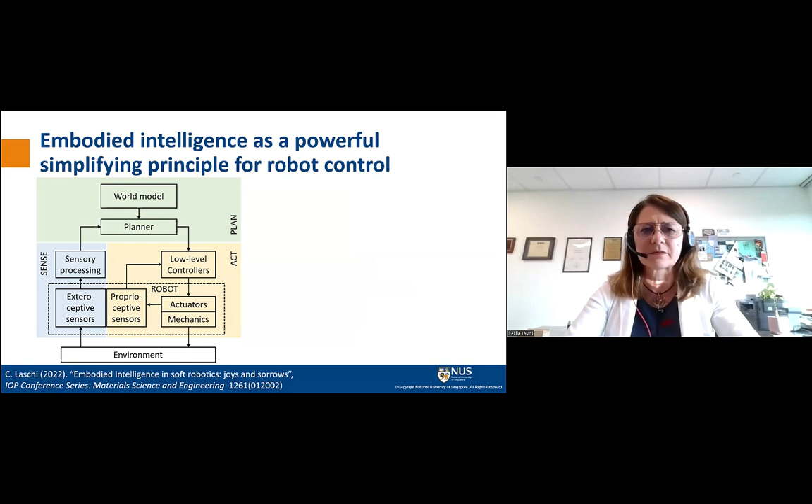Embodied intelligence can be a very powerful simplifying principle for robot control, because it introduces the use of external interaction forces from the environment - an additional arrow from the environment directly to the body. This is what we were discussing - what is embodied intelligence, which we want to discuss in this conference. This is, for me, the meaning of embodied intelligence. And why is it a simplifying principle?

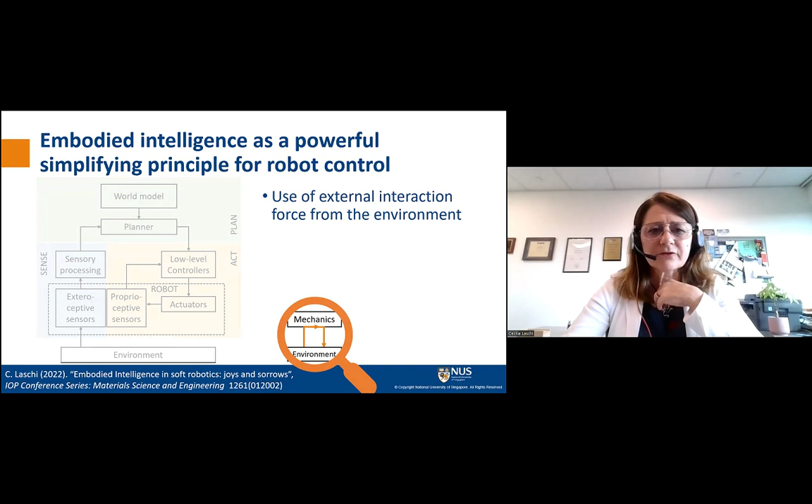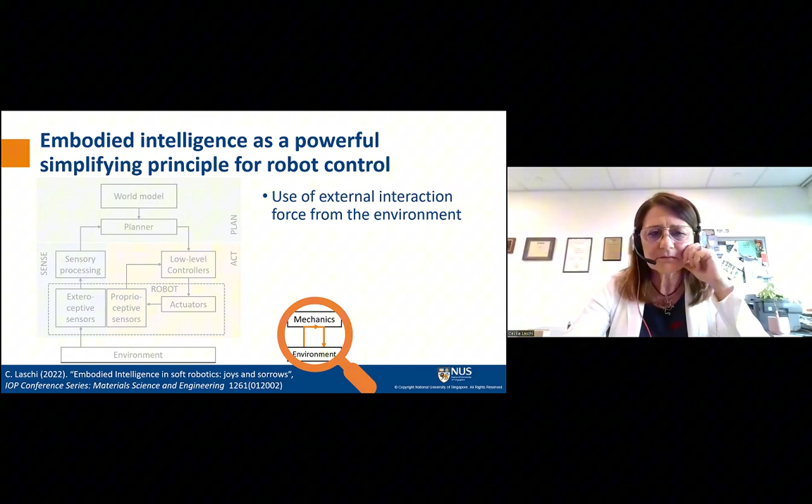Because it's like closing a control loop here on the robot body only, focusing on only these interactions with the environment. We forget all the rest. This is what we like in embodied intelligence, and we focus on this. This is also what brings us to soft robotics, because if we want to focus on those two arrows, we want to grasp the simplifying principle of these interaction forces with the environment, then we need a soft body. We need compliance in our body.

This is also a big lesson we learn from nature. If we look around at the majority of animals, including human beings, the body mass is mostly soft. In my own research, as most of you know already, a wonderful model has been the octopus. It's not just a model for soft robotics, but also for embodied intelligence, because it shows very clearly how many tasks can be simplified by using the interaction with the environment.

This is just one of the many examples we can learn from an octopus. This is the reaching movement to grasp an object, and you see there is a very nice bending which completely reduces the water drag. So this movement is not against the water, but is helped by the interaction with the water. If we look at the biology of it, we found that the brain of this animal only has to set three parameters, and the rest is done in a very simplified way thanks to the morphology - the fact that the body is soft, the arm is soft, and the interaction with the water, which helps. In this project here in Singapore, I'm trying to demonstrate it with some numbers.

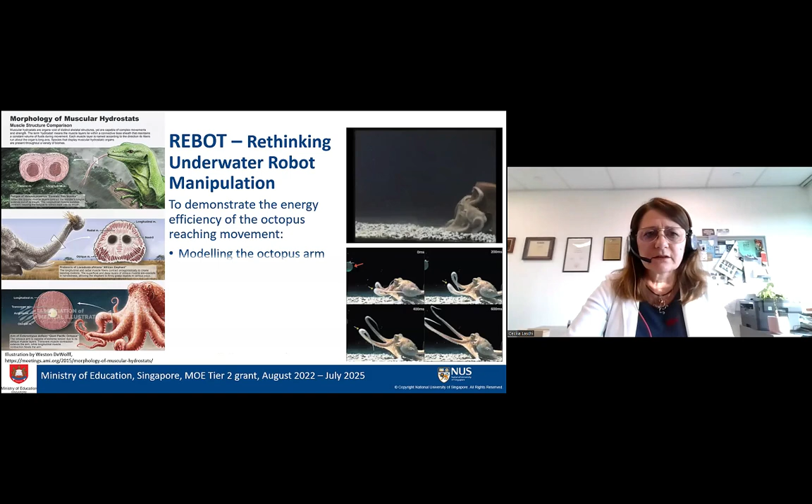We want to demonstrate the energy efficiency through some fluid dynamics. We want to model this arm and model the interaction with water, and then, of course, to build a robot. And thanks to this other project, which is a collaboration between Italy and Singapore, we could collaborate with Polytechnic of Milan, who developed a modeling framework for muscle activations, and we can simulate the activation of all the muscles in an octopus arm.

So what you see in this simulation is one of the many patterns that we tested. This is the best one, which gives a movement very similar to the octopus one. So we found which muscles should be activated and when to obtain the same reaching movement.

And as I said, we want to use all this in robotics, and this is a prototype of a robot that can do the same reaching movement. It's also very fast. So what is interesting here is not the movement itself, but the fact that similarly to the animal, the proximal part, before the bending, is very stiff, while the rest, the distal part, is completely passive. This is the secret for the animal to be helped by the water instead of fighting it.

So all this movement in the animal involves many muscles, so very complicated control. We have just one actuator, which is a tendon with a motor. So super simple control. This is another possible movement in the octopus, which is the swimming movement.

Let me jump to the better part of the video.

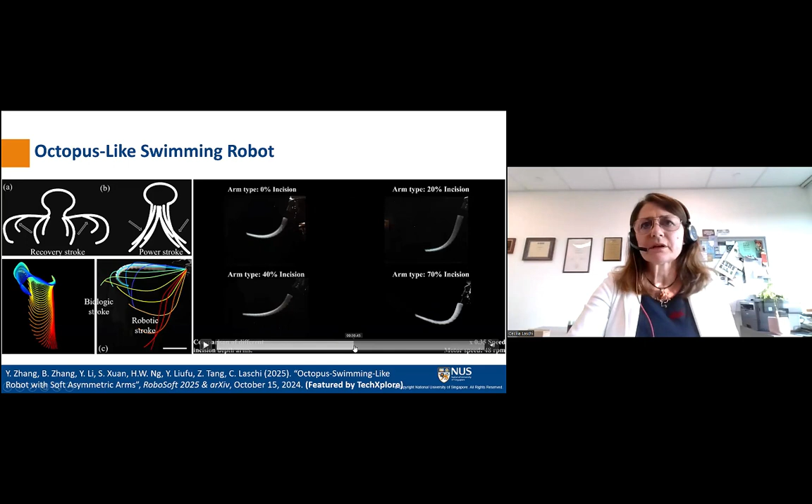So we study how we can generate propulsion with an anisotropic stiffness of the arms, and this is how the robot can swim. Here as well, the fluid dynamics is pretty complex to generate propulsion, but we only have one actuator, one motor. We can have 2 if we want to steer, but 1 is enough for swimming.

We also investigated another interesting characteristic of the octopus arm, which we found also in the elephant trunk, as well as in so many structures in nature, including plant structures, which is the logarithmic spiraling. They all follow this mathematical relation. So we built a prototype which has the same morphology, it also follows the logarithmic spiraling, and it can produce very similar movements as an elephant trunk.

We have data from elephant trunk, so that's why we consider it for comparison. Even if it's completely different in terms of muscle arrangement, here we only have 3 cables, 3 actuators acting as tendons with their motors. So completely different structure, very similar movements, because we follow the same principle of logarithmic spiraling. Again, 3 actuators only, simplified control.

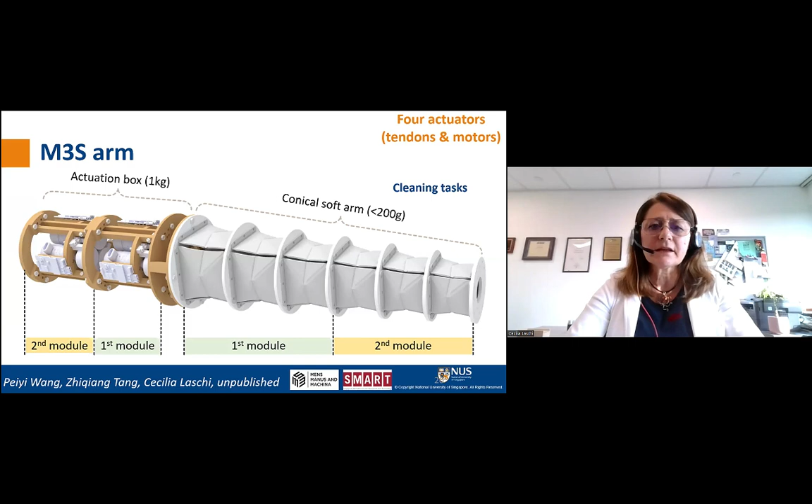Here you see that you cannot see the actuators inside. They are also cables, and we have 4 actuators, so the number is starting to increase a little bit. And it can actually do very nice things. It can completely contract this way, and it can bend also very nicely, very widely. But again, now we start having some more parameters to control.

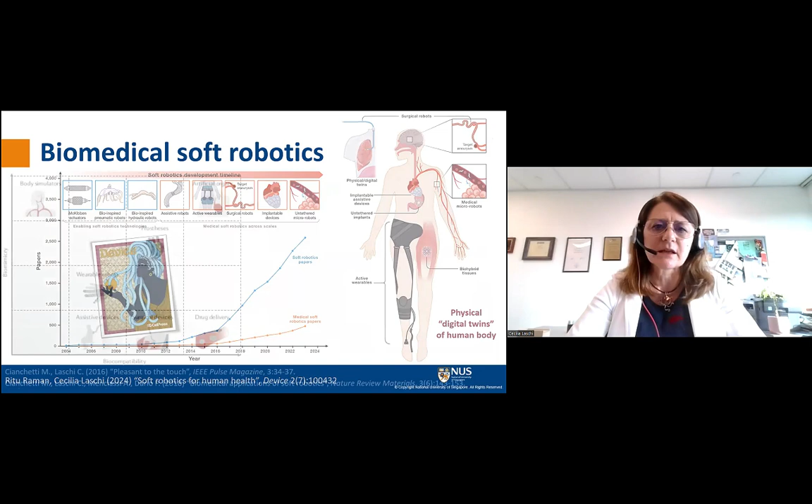Biomedical applications of soft robotics are also increasing. They increased a lot in the last decade, and there are really many different areas where soft robots can be used in medicine, the biomedical field. One of them is personal care, caregiving, assistance to the elderly, for example, which is a priority also here in Singapore. So we are addressing assistive soft robotics. This is the concept of an arm for helping elderly people to stand up from sitting or transfer from a chair to another.

So we developed soft arms for this. They have anisotropic stiffness as well. Actually, inside this module, there is a part which is also inspired by the octopus, and it's confidential because we are patenting. In this case, also we have some more actuators. We have 2 actuators per arm, again implemented with tendons and motor.

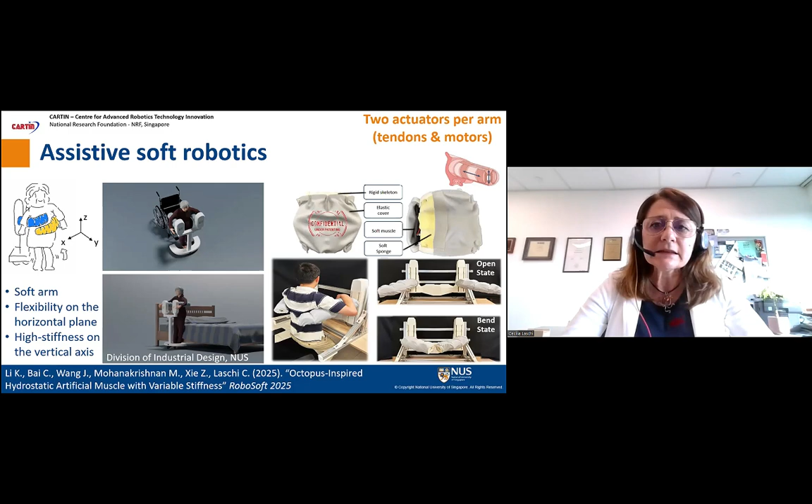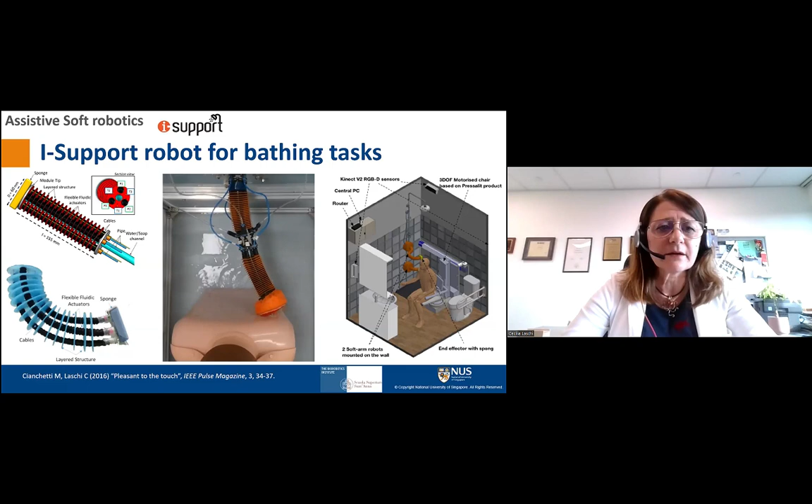In a previous project in Europe, a European project I-Support, we designed this other arm, which is for bathing tasks, for showering. In this case, you see there are 2 modules, and each of them has 3 pneumatic chambers and 3 tendons with motors. So again, the number of actuators is increasing, and the number of control parameters is increasing.

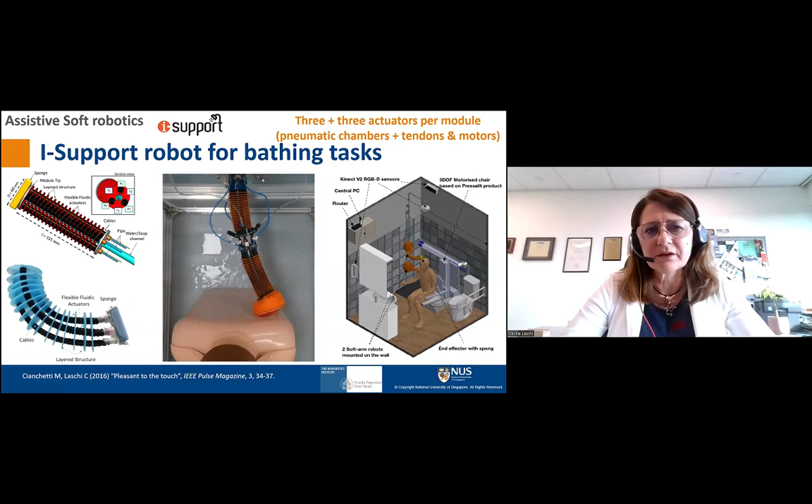But in tasks like this, we really want to control precisely the end effector, and not only the end effector. So that's why these applications are bringing back the need for control that we wanted to simplify with soft robotics and embodied intelligence. So what's the issue with soft robot control?

The traditional approach is using models of the transformation between the actuator space, whatever the actuators are, and the task space, so the end effector position. Of course, we can apply this model-based approach to soft robots, but do we have models?

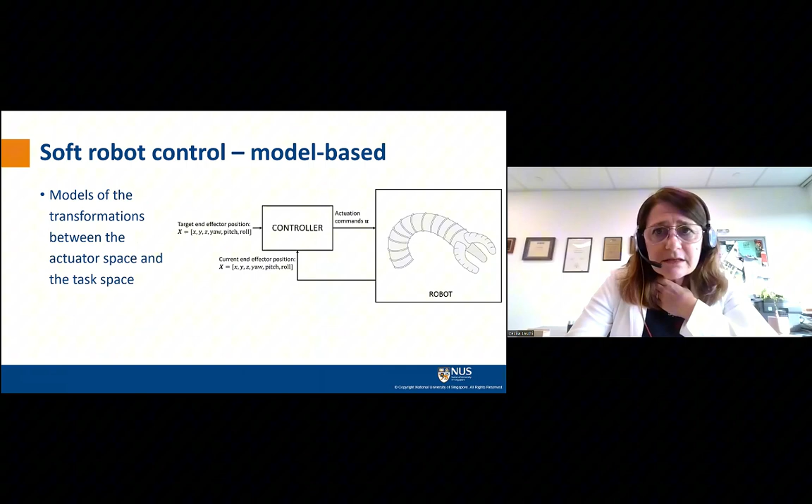So we proposed this approach a couple of years ago, using one general equation. The message is that it has to contain both the internal and the external interactions. We also reviewed existing techniques, because there are techniques for both cases, either in the continuum mechanics realm or with some parameterization, and of course there are also data-driven methods to solve those modeling problems.

And so we have the models. We can do some model-based control, but we have another option, which is to replace the controller completely with learning, with a neural network for example. This is an approach that is being used.

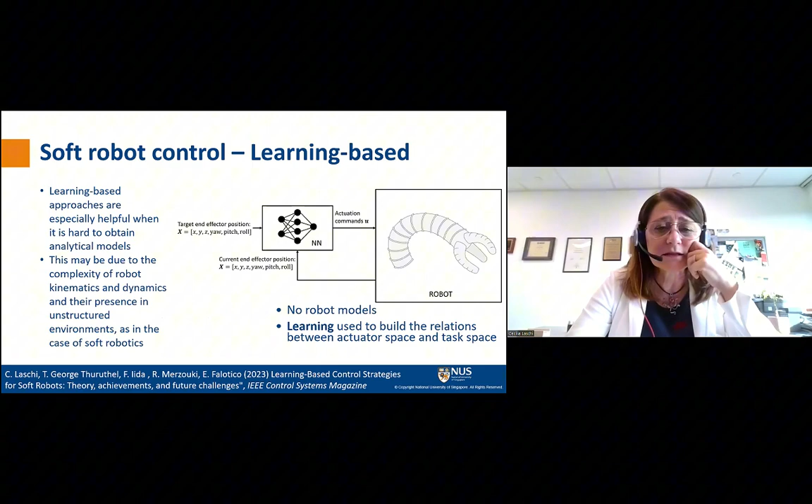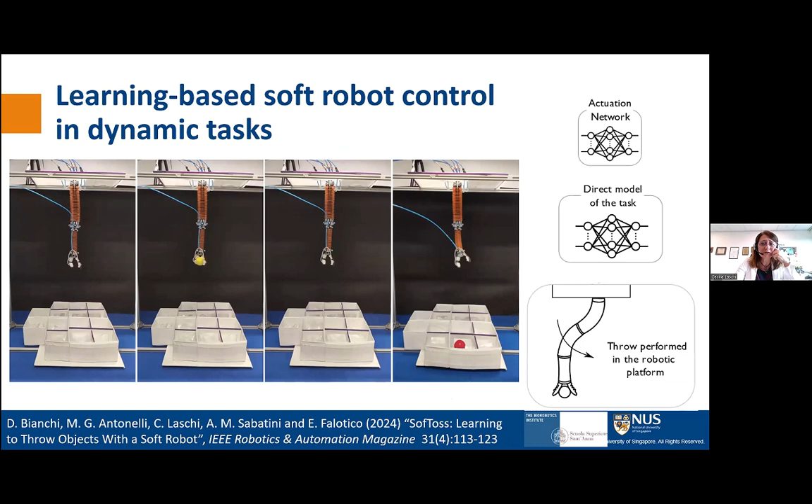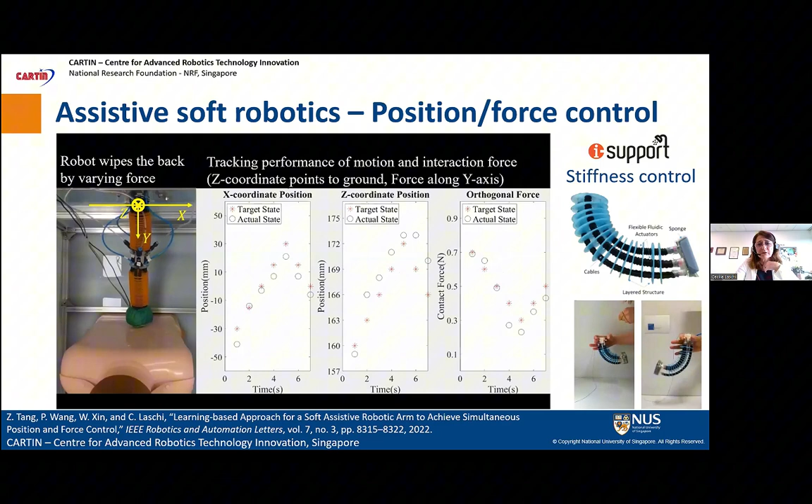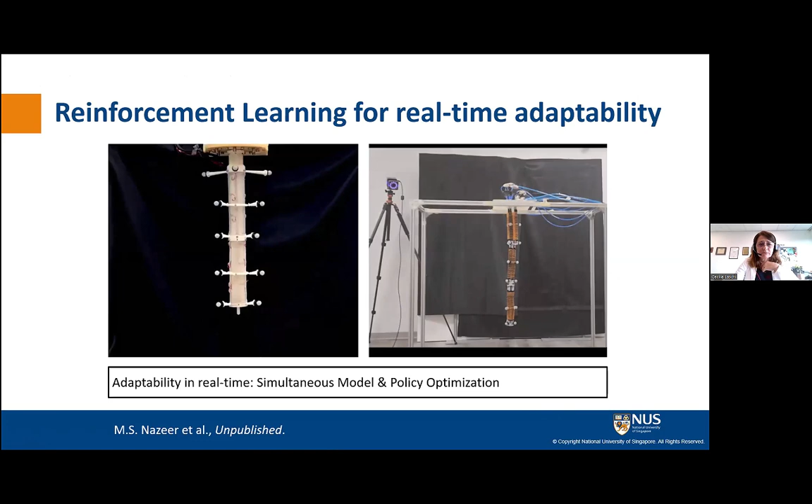We generate directly those relations, and we can probably better cope with dynamic tasks, like those assistive tasks where we want to control not only the position but also the force, if the soft robot allows that, or we may wish to control full body position in this case.

And this is actually a growing field. We know the number of publications in robotics is growing, but it's also growing the number of publications addressing control problems, and among them those addressing learning-based control. So this is one direction our community is taking.

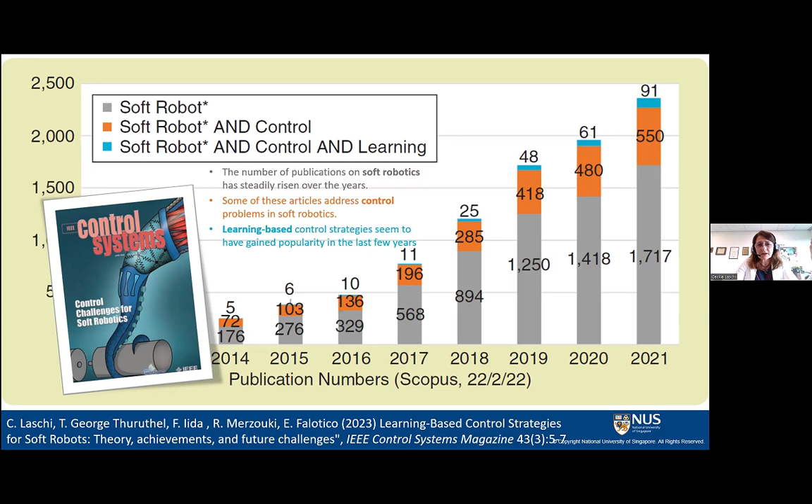But there is also an opposite direction we can take. So what about removing control completely? I mean the electronic part of control. What about electronics-free robots? So we don't have any actuators to control in the traditional way.

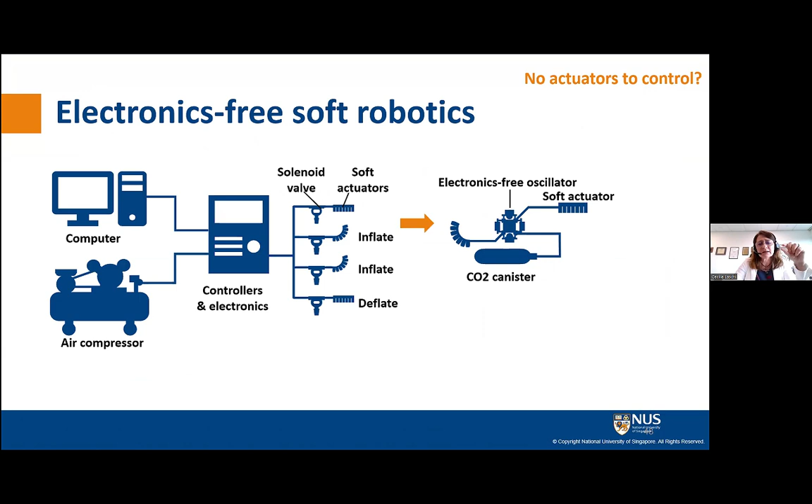In this example, we replace whatever is controlled, like the valve controlling the actuators in these fluidic robots, with a bistable mechanism. This mechanism can actually oscillate between its two stable states with just one constant input, which is the pressure. It acts as an oscillator, and oscillators can do very interesting things like rhythmic movements.

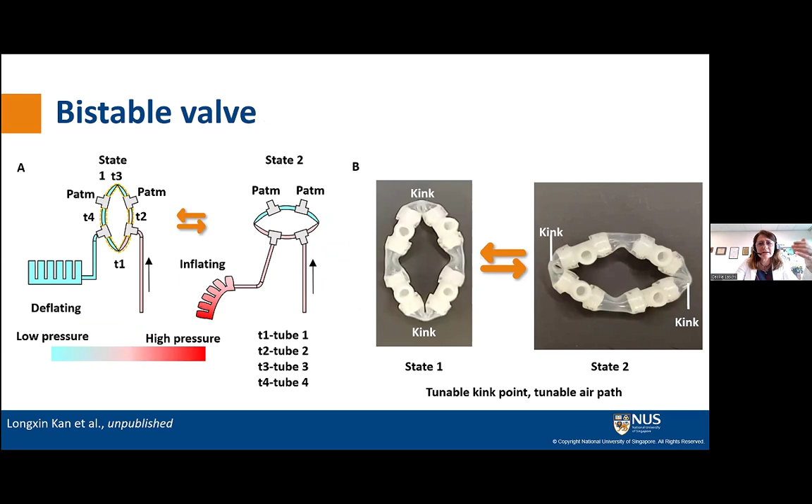In this example, we add a switch, a mechanical switch. So the two states change when there is a mechanical stimulus, for example contact. Then the system goes into the second state, where the fingers of this gripper are actuated and they can grasp an object.

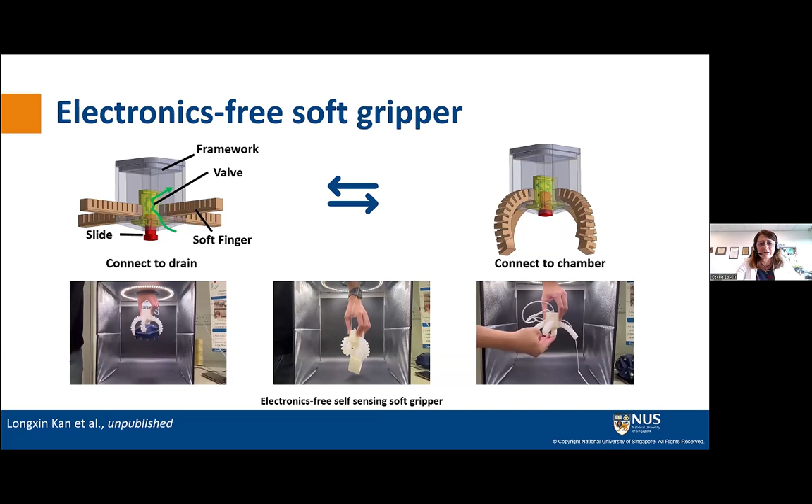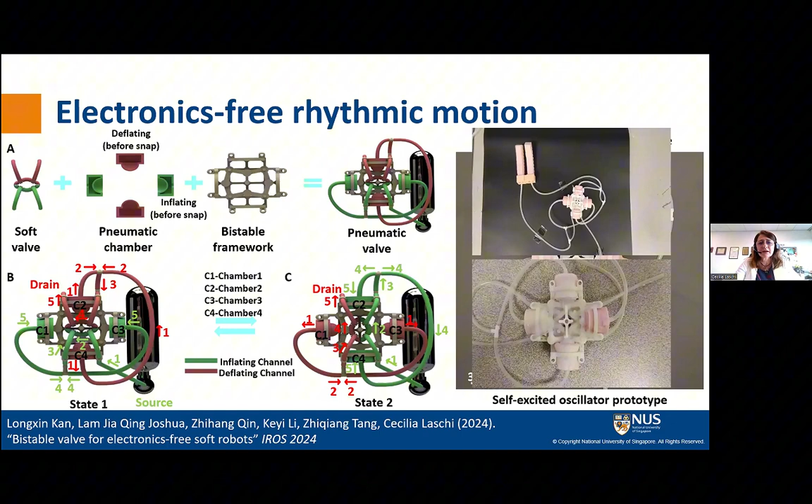But as I said, we can produce all kinds of rhythmic movement with a bit more complex fluidic circuitry. With these rhythmic movements, we can control actuators and enable all sorts of locomotion patterns, like walking or swimming. So now I'll move to my conclusions.

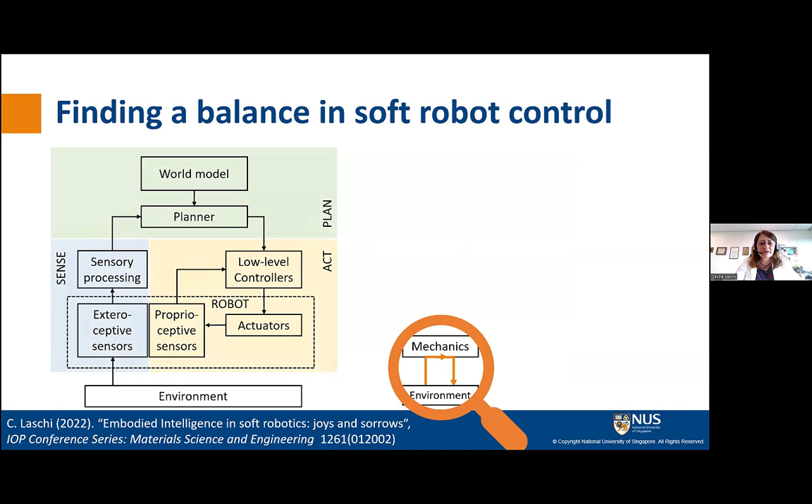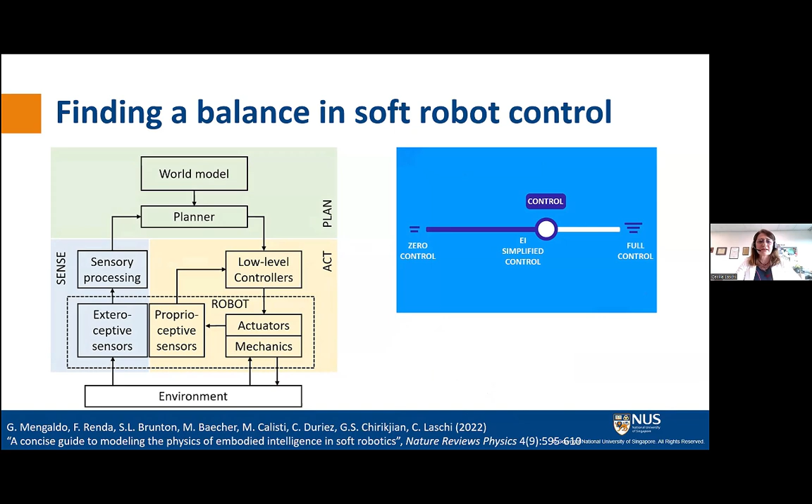Which is pretty simple: we had to decide the direction we want to go, starting from embodied intelligence, and we need to find a balance. Maybe we should put embodied intelligence back into the full picture, and consider all the different levels of control that are possible, finding a balance between the two extremes of zero control, full traditional control, and intermediate levels simplified by embodied intelligence.